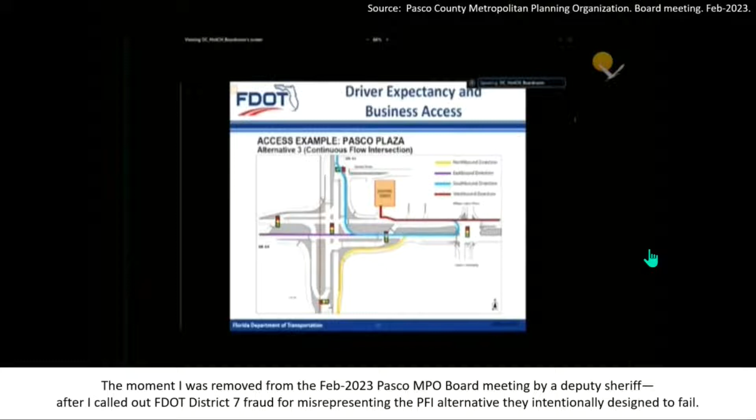Okay, that's a first. That's horrible. Shame on you. I was wondering, why do we have 2 bailiffs today? Now I don't mind.

So they had an extra sheriff there just for me because Gwynn knew that I was upset over the whole thing and knew that I was going to probably make a fuss. And before the FDOT presentation, at the very beginning of this board meeting, I gave a 3-minute presentation, and that's following a 10-minute presentation I gave to the board in January with basically all my complaints. All of it fell on deaf ears.

Here they're just laughing at me. This guy is Commissioner Mariano, and he's laughing at me after my being removed from the room. You know, these people on this board, they're all corrupt. Every one of them. This guy has been or is being investigated by the FBI. He's also a member of the Pasco Economic Development Council board, or ex officio member of that board, which I consider to be a conflict of interest between that role and serving on the MPO board.

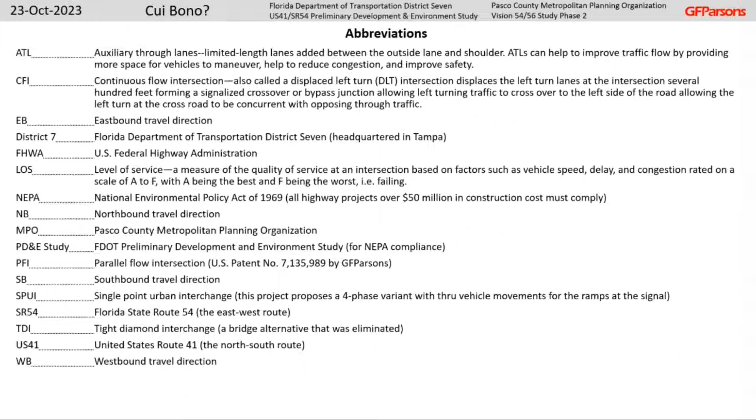Here's a list of abbreviations that I'll be using throughout. You can pause the video and read through these if you wish, or refer back to this as needed.

So this project is sponsored by FDOT District 7. The local public agency is Pasco MPO, a Metropolitan Planning Organization in Pasco County. The project title is US 41 at SR 54 Intersection Improvement Project, and the current phase is the PD&E study. The PD&E began, I believe, sometime early 2012. I did not become interested in this project until 2014.

The project opening year was originally 2020, and that's the opening year that I responded to when I proposed my PFI to the district. It was later changed to 2030. Completely unjustified and enraging to me.

The project is located in Land O'Lakes. So Land O'Lakes in southern Pasco County is a bedroom community of Tampa. And the majority of the traffic at this intersection is commuter traffic. So in the morning, it's traffic that's heading south to Tampa, and then in the evening, going home. Both of these roads, US 41 and SR 54, are classified by FDOT as principal urban arterials other, meaning they are non-freeways, and that's important.

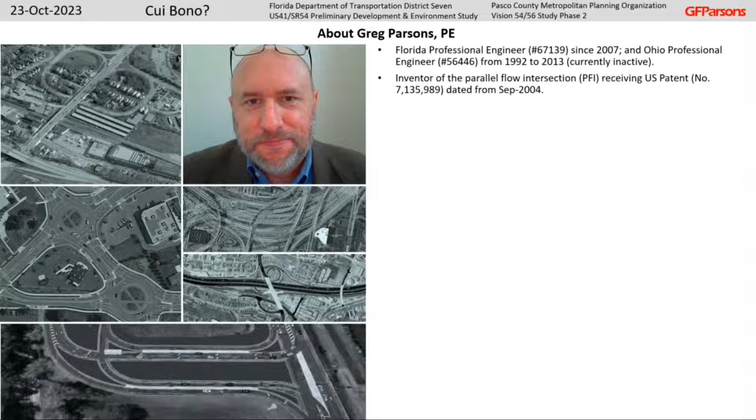So about me. I am a licensed engineer in the state of Florida since 2007, and before that I was a licensed engineer in the state of Ohio. I used to live in Ohio and moved to Florida and allowed my Ohio license to go inactive. I invented the parallel flow intersection, or PFI, and I obtained a patent for it, which is dated from September 2004. I'm the sole expert on the PFI.

I have 37 years of experience in roadway and traffic engineering, and 28 of those years employed by architectural engineering consulting firms working on state and local agency roadway and engineering projects. I've served as lead engineer and project manager of preliminary development for several mega projects. These would be projects that would be like $100 million or more in construction, with construction totaling over $5 billion in current year dollars, including capacity upgrade of urban interstate and new rural freeway alignments.

I have experience with preliminary and final design of urban and rural non-freeway major and minor arterials and local roads, preliminary and final design of urban and rural interstate and state freeways and interchanges, modern roundabout engineering, preliminary design of other non-traditional traffic junctions, aside from the PFI, including the continuous flow intersection, diverging diamond interchange, superstreet, and others. I have a Bachelor of Science in Civil Engineering with a concentration in Transportation Engineering, and I do business in the state of Florida as GF Parsons.

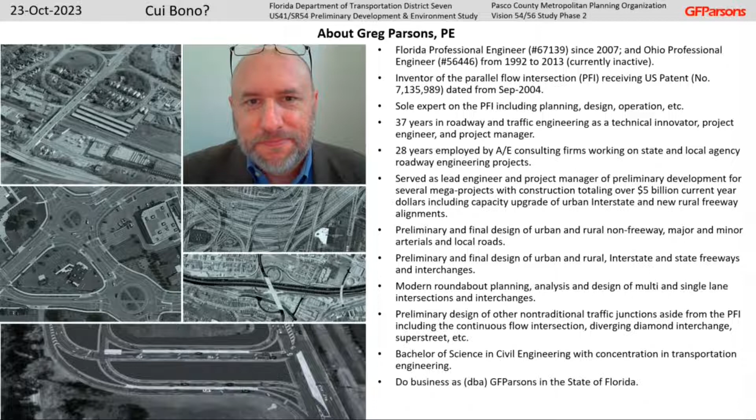So before I go on, I want to give a brief overview of the PFI, since I know it's new and most everyone has likely never heard of it. People in transportation engineering in this industry, I think, should have at least heard of it or know of it.

So the PFI, the way it works is to have drivers that intend to turn left enter into the left turn lanes, which are in the center, like you would at a normal intersection. But instead of turning through the main intersection onto the crossroad, the left turning driver turns onto what I call a bypass road, which is parallel and adjacent to the crossroad. So this bypass road functions like a frontage road. People turn onto this bypass road. It directs them to a crossover junction, I call the bypass junction, where they then go through and continue on.

All the junctions at the PFI are signalized, and the signals are functioning as two-phase signals. So it's 2 phases per cycle. So what that means is the person turning left, which the left turn is in this blue line, the person turning left onto the bypass road does that at the same time the crossroad through traffic is going. So those become overlapping movements. And then when the approach road through traffic is going, the crossroad left turn is at the same time. And those are the 2 phases.

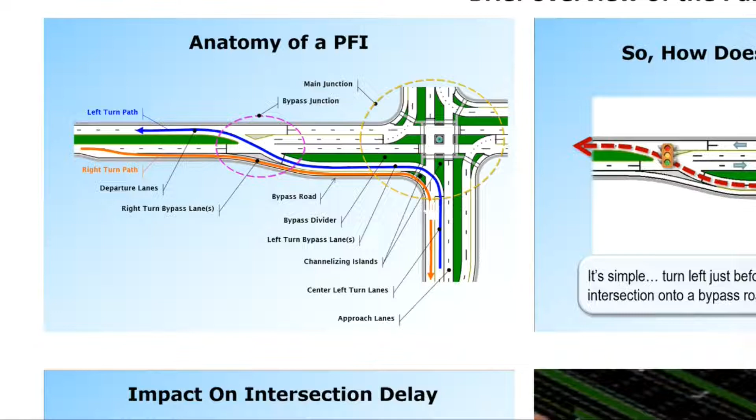The orange line here is the right turn path. I think it's pretty straightforward, simple operation. I think that FDOT would have you believe otherwise, but it's pretty straightforward. It is confusing looking. If you're looking at it from a helicopter, it'll look confusing, but that confusion is really unfamiliarity. When you look at it, it's going to be like, what is that? But once you understand it, it makes sense.

This graphic just highlights the left turn path onto the bypass road. All of this channelization here at the main junction prevents, for the most part, a driver making a mistake. There's really no way to screw this up. If you're making your left turn, you have to turn onto the bypass road, and then there's additional channelization at the crossover junction to guide people onto the crossroad.

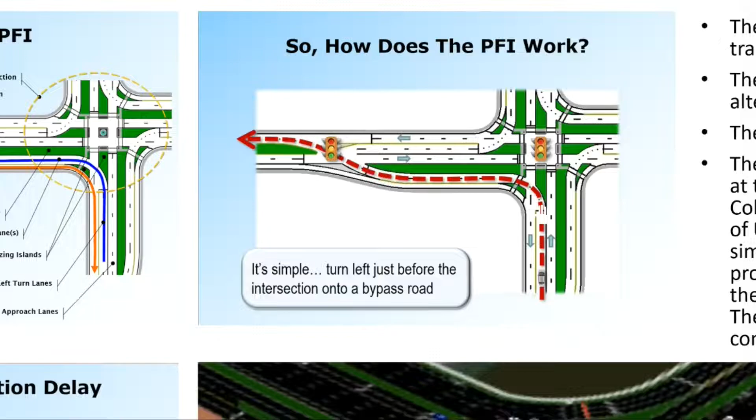The benefit that this arrangement provides is to greatly reduce delay and congestion over a conventional intersection. So this graphic here just shows, say, a situation where a conventional signal would be at over 150 seconds of average vehicle delay, which is failing. That would be a level of service F. The PFI can reduce that. This is with the same number of lanes basically, but with the addition of the bypass roads, the PFI can reduce that delay by over 80%.

You know, and if your time is valuable, if you don't want to spend your day stuck in traffic or sitting through multiple signal cycles on your way home from work or to work in the morning, then the PFI is really great. And the CFI too. That's a similar design. Okay.

FDOT does not care how much time you spend sitting there at the signal. They really don't. That's one thing I've learned over many years, is that FDOT and all the DOTs across the country, it's almost a point of pride for them to see people stuck in queue. It's almost like, oh, we got you, suckers. That's kind of their attitude.

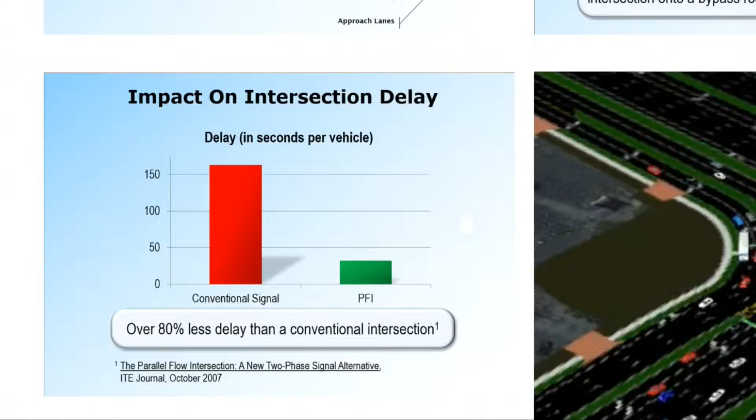So anyway, the PFI increases capacity and reduces delay over traditional signal with fewer phases per cycle. PFI is an efficient, low-impact, low-cost alternative to grade separations or bridges or flyovers. So you have a busy intersection that is very congested. In the past, the way to fix that, well, add more lanes, but that doesn't typically help very much, or build a bridge. Okay, but building a bridge is very expensive. Not that they care, but it's very expensive.

But also building the bridge doesn't really solve the problem. It turns out to be less of an effective solution than people think, because when we think of bridges, we typically think of freeways. But when you build a bridge on an arterial road where there's signals and you have heavy turning movements where people are making left turns, right turns, the bridge only tends to serve a fraction of the traffic.

You don't have a big dominant movement like you do on a freeway where you have tons of traffic on the freeway and not so much traffic on the side road. So there the bridge really does make a big difference. But when you have an arterial intersection like this one, where you have heavy turning movements, the bridge doesn't really deliver a whole lot of benefit. Again, not that FDOT would ever admit that.

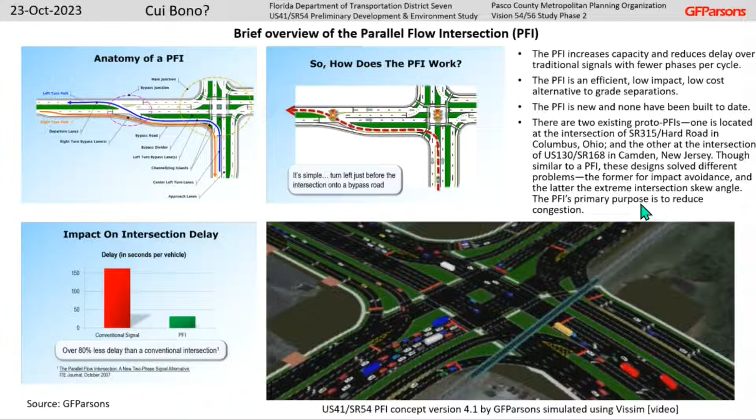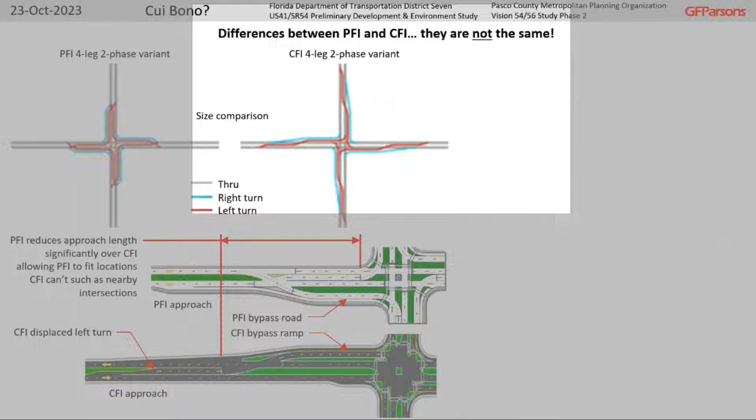So I want to go over the differences between the PFI and CFI. They are not the same. Okay, they're not the same. I wouldn't be able to get a patent on the PFI if it was the same as the CFI. This is completely lost on the DOT. Not that they care, they don't care. But they like to say, oh, the PFI is just a CFI. How can you patent that? Well, no, they're different junctions. They're different. Okay. So here is a size comparison between the PFI and CFI.

And this is the main reason that the PFI provides added utility over the CFI, is that it's more compact on the approaches. The PFI takes up half as much space as the CFI, which matters in urban environments where there's often not a lot of space, particularly between adjacent intersections. The PFI can potentially fit more locations than the CFI.

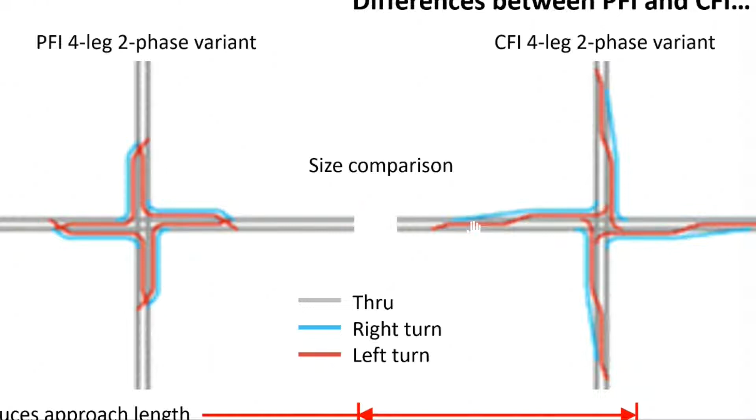So the CFI displaces the left turn lanes, which is illustrated here. So this is the stop bar for the left turn in the center, and it's been moved back from the crossroad and the main junction hundreds of feet to make room for what I call the CFI's bypass ramp. This is a bypass ramp. The PFI is a bypass road, CFI is a bypass ramp. I make that distinction because of the way the CFI is intended to operate.

So what the CFI does is have people making their left turn, they cross over onto the bypass ramp, and they get a green indicator here at this signal. So they're getting a green light. They proceed on through and make their left turn. So they don't stop here. They're not supposed to stop.

So the way the CFI is arranged, its geometry, is based on basically how much distance is required to coordinate these signals such that the people, when they cross over at this crossover junction, by the time the leading vehicles reach this point at the main junction, they've got a green light, they keep going. They make their left turn without stopping.

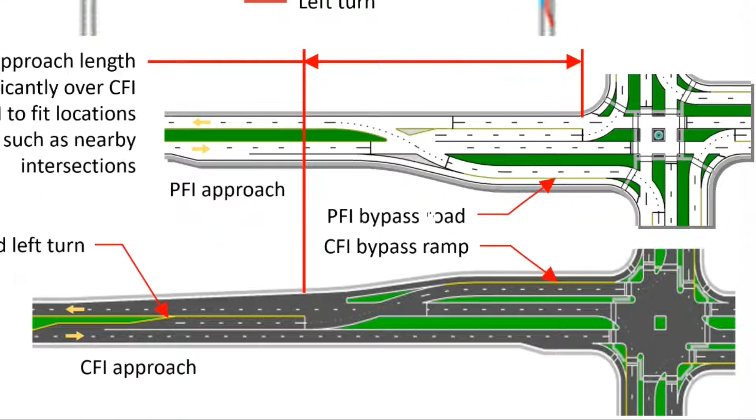The PFI requires less space on the approaches, so it's more compact. The difference between choosing the PFI and CFI is not a matter of capacity or its level of service. They're going to be roughly equivalent. It really comes down to site and site impacts. Which one is going to fit the site better?

That's a distinction, again, lost on the DOT, and I believe intentionally, willfully so. They don't want to have to think about it. Everything for them has to be a cookie cutter solution, because if it's not, that might mean they have to work. Bureaucrats don't like to work. They hate that. They hate working.

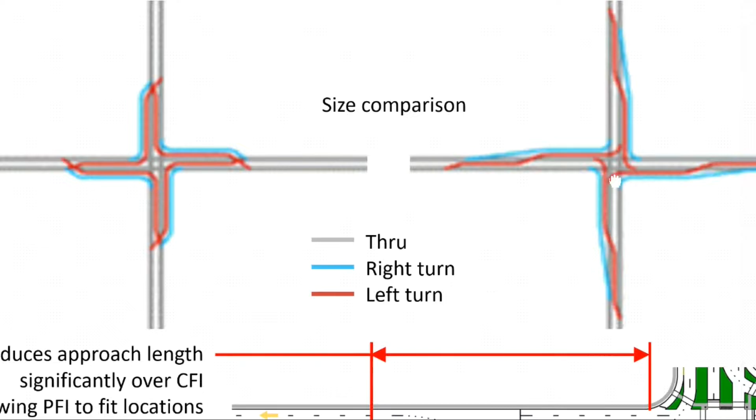Okay, so the CFI is a high capacity signalized intersection, as is the PFI. FHWA calls a CFI a DLT, or displaced left turn, because it displaces the left turn. The PFI does not displace the left turn. It's more like an offset left, not a displaced left. FHWA has refused to acknowledge the PFI until one gets built. And the state DOTs and local agencies have been very reluctant to consider a PFI because Federal Highways doesn't acknowledge it. So I have had to contend with this bureaucratic catch-22 for years.

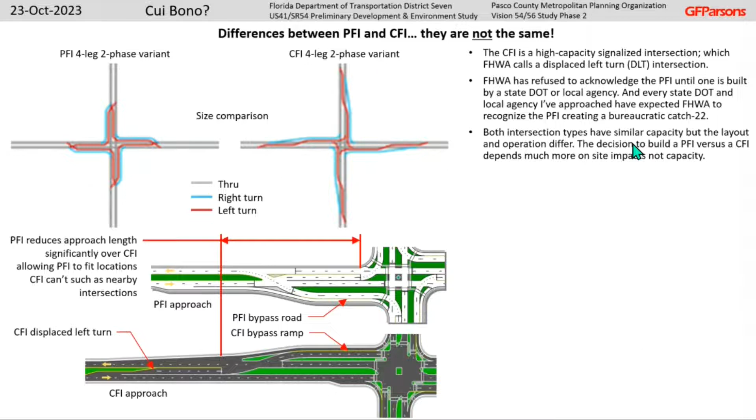Both intersection types have similar capacity, but the layout and operation are different. So again, the decision to build the PFI versus CFI depends on site impacts, not capacity. The PFI is more compact than the CFI and affects different intersection quadrants. The PFI requires widening of the crossroad, while the CFI requires widening of the approach road. PFI has 3 signals that traffic goes through, and the CFI has 2. So that means the PFI does involve more stops than the CFI. But those stops are incidental.

They're incidental relative to a congested traditional intersection with stop and go traffic, where you may have to stop a dozen or more times to get through the signal. Whereas at the PFI, you'll have to stop maybe a little less than 2 times on average. Some drivers 2, other drivers maybe only once, depends on when they hit the signals. And the CFI is going to be less than that on average. The CFI might be 1.25 stops to a PFI's 1.75 stops. That's the kind of difference we're talking about.